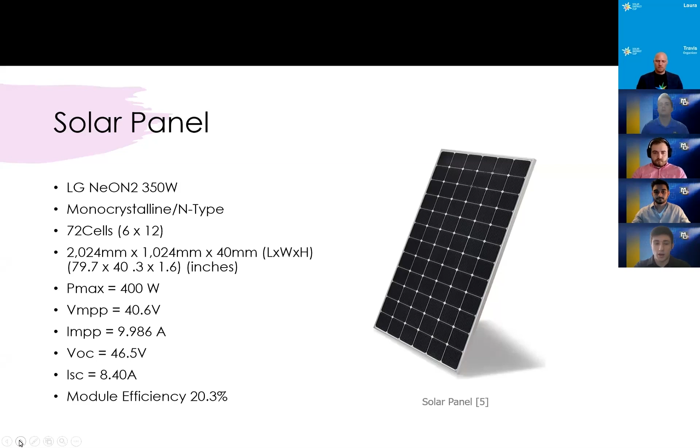For our solar panel analysis, we went with an LG Neon 2 series solar panel. We chose this brand as LG is one of the leading manufacturers in solar panel production, and the Neon 2 series is highly regarded and trusted by those who have used the model. Our criteria for the solar panel was that it had to be reliable, it had to have a good module efficiency, and it had to be able to withstand the harsh conditions of Denver as they receive a lot of snowfall.

And moving on, our criteria for the buildings to host our solar panels was that they had to have a lot of space on the roof, and secondly, they couldn't be shadowed by any other surrounding buildings or objects. So to start, we're looking at the west and south classroom on the Auraria side. This was an easy choice for us, as it already had a solar panel array built on the north side of it, I believe, and there was much room left that we could utilize for the roof.

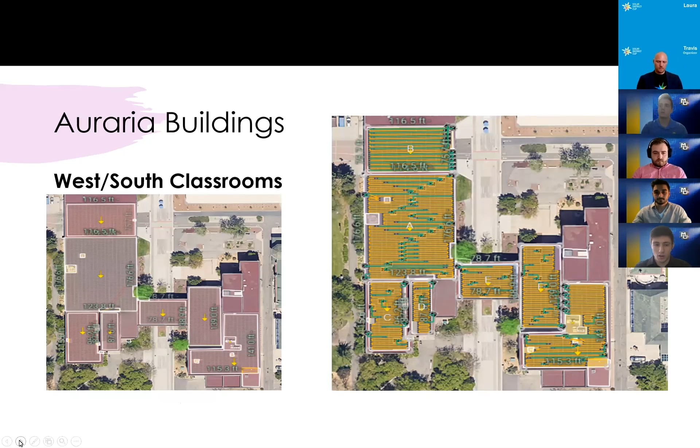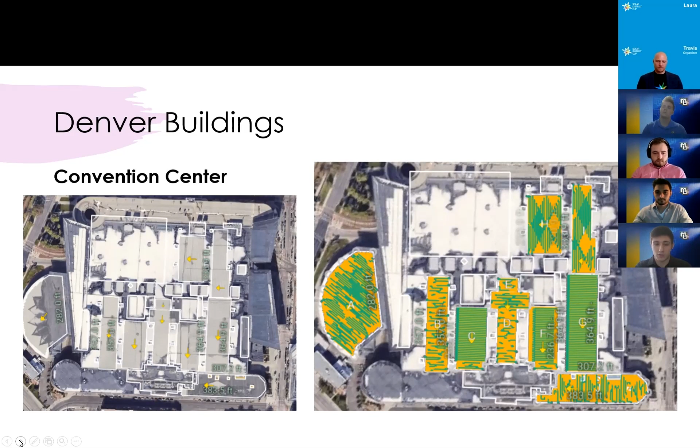And then moving across the boulevard to the Denver side, we have the convention center. As per the guidelines, the top left of the convention center is not to be used as it is undergoing renovations. However, it is still by far the largest structure. And as such, we wanted to take advantage of the space and really milk the solar panel potential for all it had. And then finally, we have the theater complex building, specifically the Helen Bonfils Theater, which is a flat top roof that neighbors the convention center.

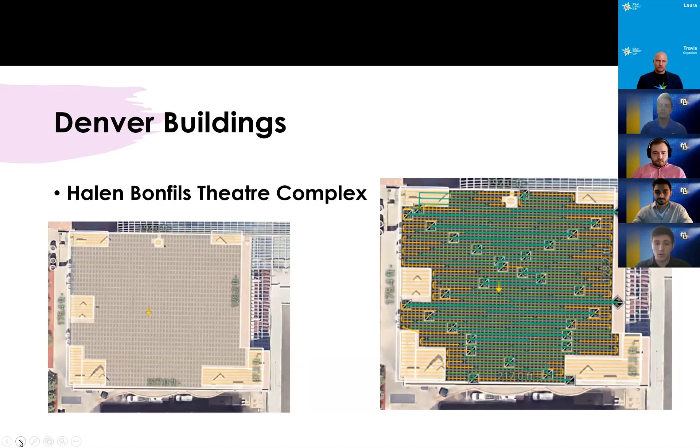And then here we have the estimated output of each building, assuming normal working test conditions every day year round, with an average of 4.87 hours of peak sunlight the panels would receive a day.

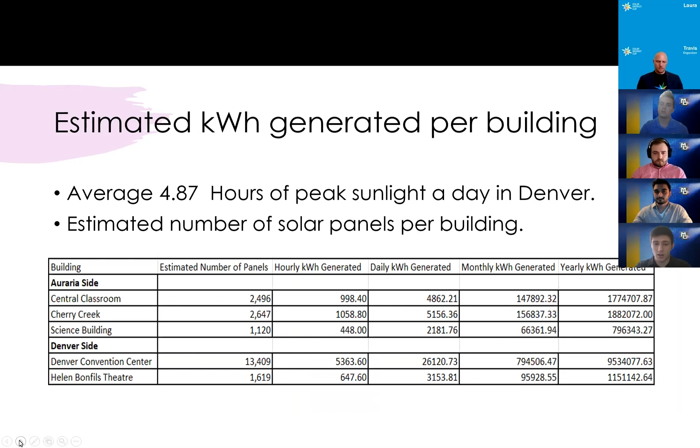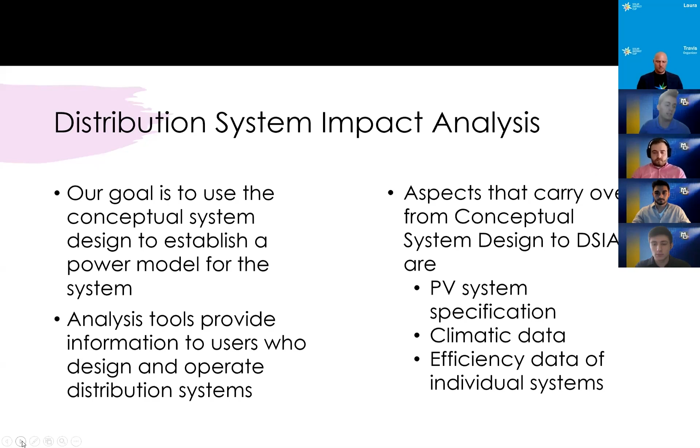And that will bring us to the distribution system impact analysis deliverable. The goal for this section was to use our plan from the conceptual system design to develop the power flow that would work for the system, while gaining an understanding of how the power is flowing through each individual system as it is right now. For us, the most important aspects of this were to make sure that we had the correct PV system specifications, as well as implement the climatic and efficiency data on each individual system.

So the main new addition to our project since the progress deliverable was the implementation of a battery storage unit. For this, we chose to use the Tesla Powerwall 2. Our thought process behind this choice was similar to our choice for solar panels, in that we wanted a reliable distributor so that we could eliminate some risk of the equipment malfunctioning, causing error and increasing costs. We ran the test to make sure that it would be reliable in the case of a blackout and that it would store enough energy to be cost efficient, as the pricing was also very important for us when making this decision.

For our power flow model, we chose to mainly use OpenDSS as much as possible because we felt it gave us the most freedom to analyze the baseline case and make adjustments gradually throughout the project. So we could observe how each change we made to our project and our proposal would affect the distribution system, and see gradually along the way if there were any changes or adjustments that needed to be made.

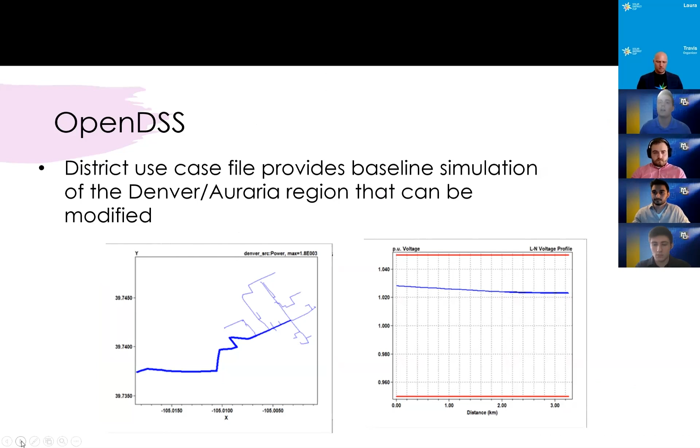And then the distribution system risks. The most important one we faced throughout this process was overvoltage, which would come from too big of a PV system or systems that are too close together. We were definitely looking at a lot of that. We also made sure that the battery storage would be able to support this PV system and help out so that we could avoid overloading the voltage.

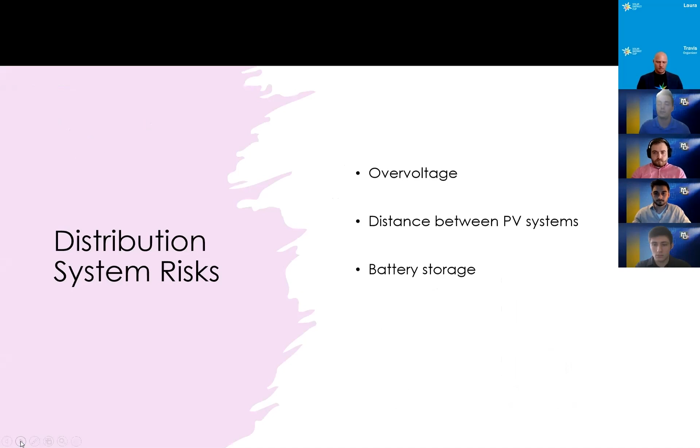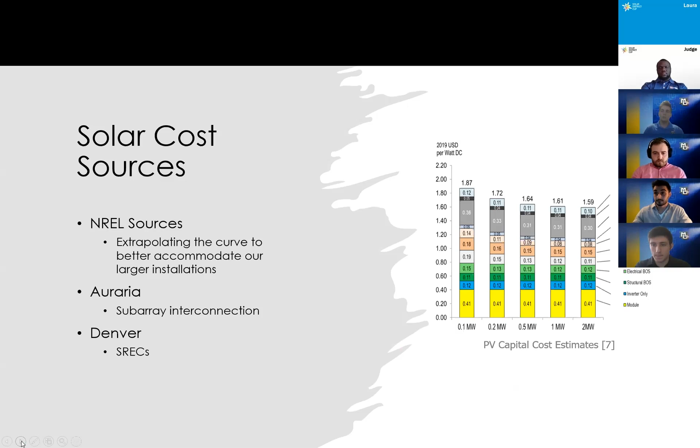After analyzing our risks, we decided to analyze our costs for solar utilizing NREL sources, extrapolating the curve to the right to better accommodate our larger installation. In our simulations, we analyzed Auraria as a large array made up of multiple subarrays on each rooftop, interconnected into the science buildings, battery, and solar ecosystem. For Denver, we decided to sell solar renewable energy credits, or SRECs, which is 1 SREC per 1,000 kilowatt hours.

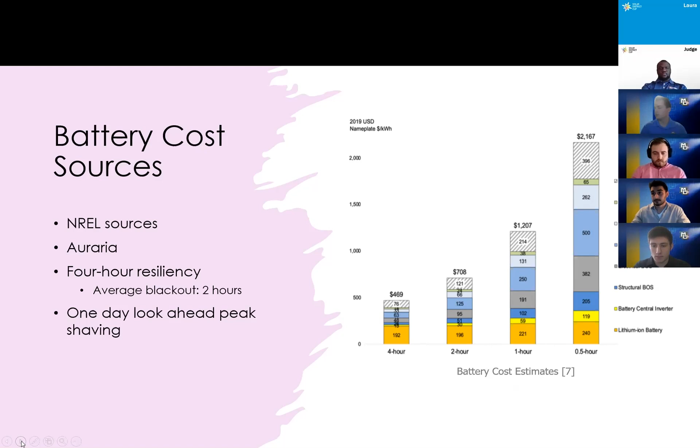Looking towards battery costs, we also utilized NREL sources, since we are installing 0.5 megawatt hours of capacity in Auraria, which would give us an average of 4-hour resiliency, twice the average blackout in the US of 2 hours. In our simulations, we utilized the batteries in 1-day look-ahead peak shaving.

For our economic inputs, it can be seen that Auraria's cost per watt is 2 cents higher than Denver. This is because for Auraria, we are installing batteries and solar, whereas for Denver, we are just utilizing photovoltaic panels. The operations and maintenance is also higher for Denver than Auraria, because we are utilizing more material there, which has to be maintained. And our SREC price after researching came out to about $200 per SREC.

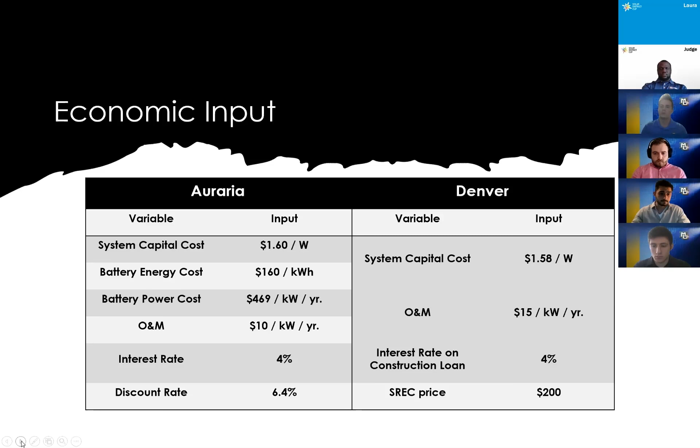Moving forward, those inputs give us a number of outputs. It can be seen that the construction loan amount is higher for Denver than Auraria. We also took into account the line build to the interconnection from the Denver Community Solar in the construction loan amount.

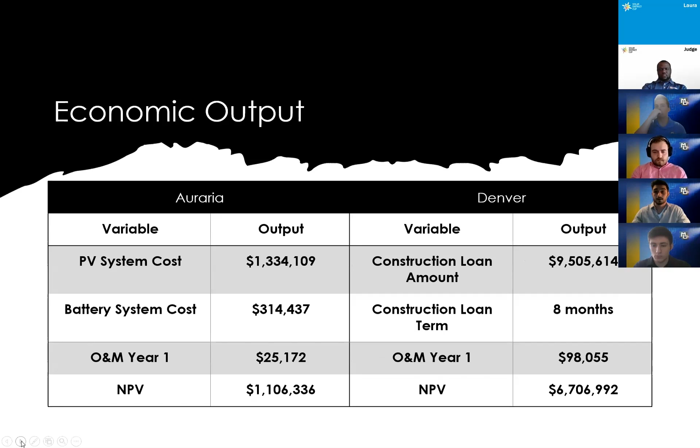The results of our simulations gave us double the P50 production for the Denver Community Solar than Auraria, giving us over 8,000 SRECs in the first year alone, which led us to a project IRR of 20.14%. For Auraria, the value of electricity savings increases exponentially after the first year of installation, which is $163,000 saved, followed by the after-tax cash flow, which turns cash flow positive after the 20-year mark.

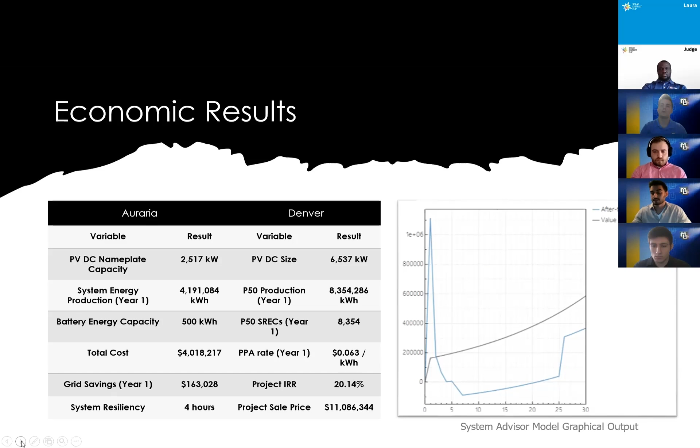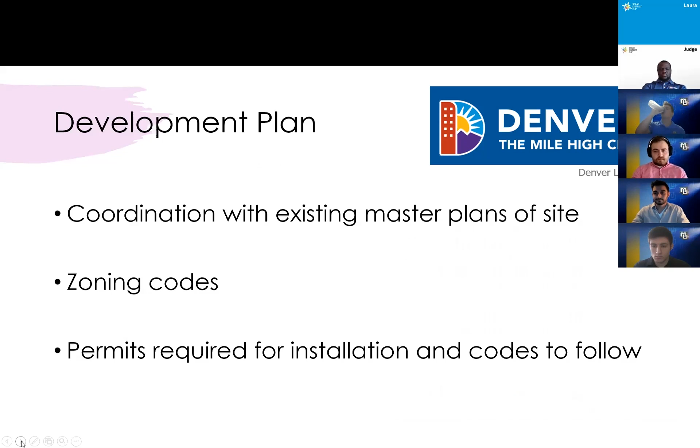The development plan essentially seeks to satisfy all requirements and expectations of master plans for both the Denver and Auraria campus side of our district. The development plan also covers all zoning codes and permits required in the installation and the timeline of installation of our proposed project.

The most significant plan that we are working around, as Nick mentioned earlier, regarding the Denver side, is the renovations on top of the convention center, essentially avoiding roughly 25% of the roof on the convention center for installation of our solar panels.

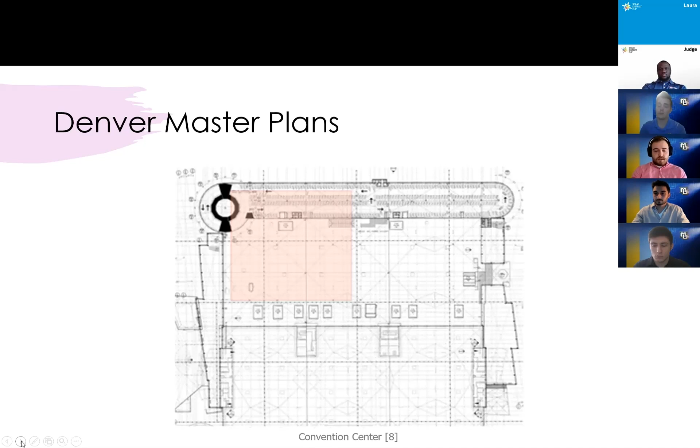One thing that we've also identified is there is a green roof ordinance in the city of Denver, essentially stating that any new or renovated roofs above a certain square footage require that a building incorporate carbon offset technologies, whether that be green roofs or solar panels. So for the renovation on the convention center, our solar panels would sufficiently meet this requirement, as well as for any other buildings in our district.

On the Auraria side, courtesy of the Auraria Sustainable Campus Program documentation, we looked at the 2018 solar PV roadmap, which essentially outlined their priority list for buildings to have solar installed on them. Since the publication in 2018, a few of these buildings have had solar installations included on them, namely the arts and library buildings that were recognized as high priority in this roadmap. So going forward, we made sure that we were still choosing buildings that met high priority line items for the campus, and also had sufficient roof sizes to meet the goals that we had for power production.

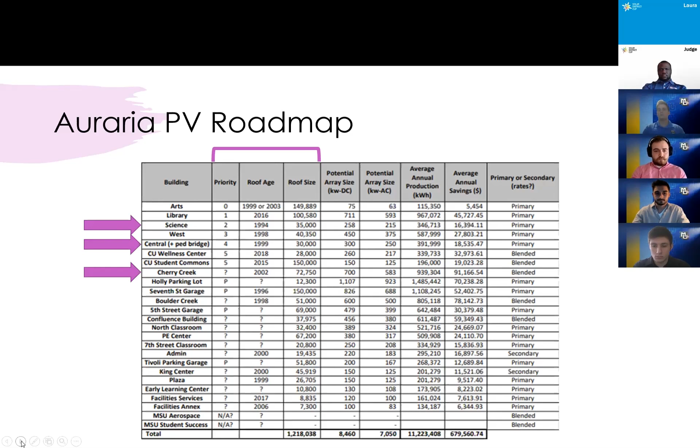In terms of permits and codes, in installing our proposed project, we would need to obtain contractor's licenses, zoning permits, which are required for any installation that includes angle-mounted panels and or batteries. We would also need to file for building logs and electrical permits. Some of that documentation is behind the IRC M2301 and IECC 2018 documentation, though some of these documents are behind paywalls and would require that we are legitimately applying for these licenses.

In terms of risk analysis, I have a few examples of risks that we analyzed, though it's an abbreviated list. The biggest mitigating efforts that we employed were using components from reliable manufacturers and reliable components themselves, as well as budgeting sufficient time in our timeline for any unexpected delays, and structuring that timeline such that we would be able to adjust things on the fly.

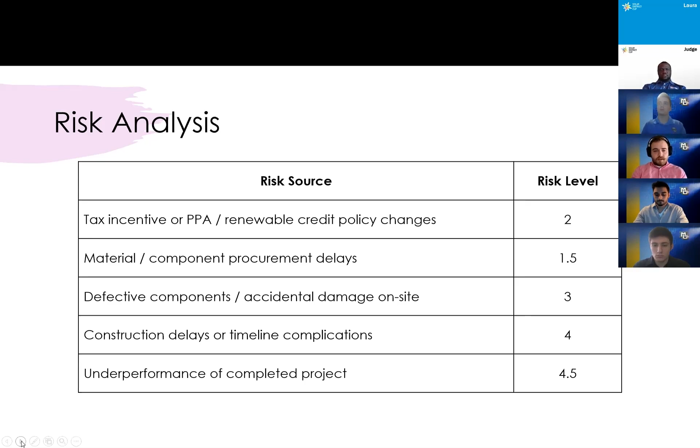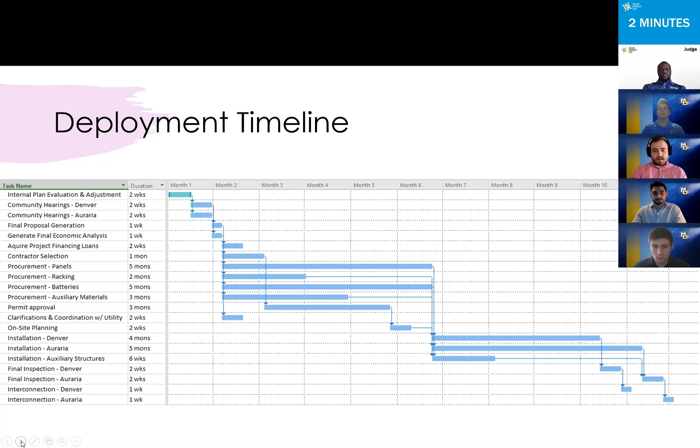And here is the deployment timeline that we have worked out. As you can see, the procurement and installation processes are the longest in duration. And this is based off of estimates in working with an industry advisor and identifying strains on the supply chain currently, as well as construction protocols in place due to COVID-19 restrictions. So in the case that some of these stresses and restrictions are alleviated by the time of implementing such a project, some of these sections could reasonably be shorter and our project would be completed sooner.

So how does all this align with the district and the competition's goals? Well, all of our installations would offset 4,814 metric tons of carbon dioxide per year, which moves Auraria closer to carbon neutrality by 2050. These installations, as well as our MIAD In Real Life Solar project collaboration, would also promote sustainability and energy in everyday life.

These projects are also economically viable, with Denver having a 20% IRR and the Auraria installation paying itself off in 14.7 years based off of our installations alone. As well as the Auraria campus having a battery backup of 4 hours on average for the science building to prevent any loss of experimental data as well.